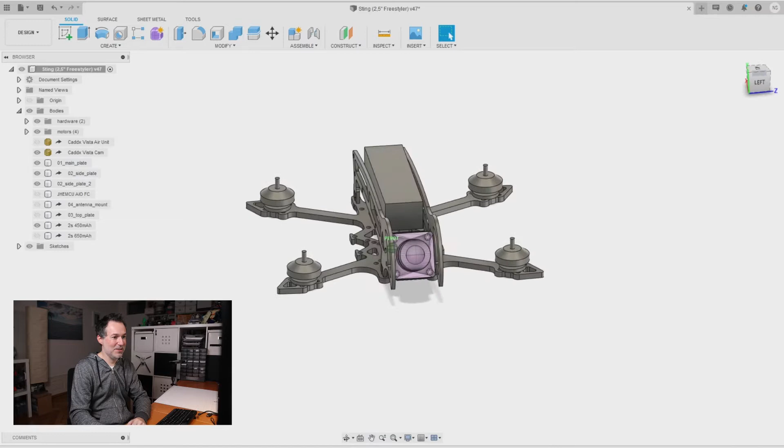As I said, it was the inspiration to have these side plates and a battery in between. In this case, this is a 2-cell 450 milliamp battery. As you can see up in front, we have the camera from the Caddx Vista, which is like the normal DJI camera. So it's not the Nebula or anything, it's the normal DJI camera.

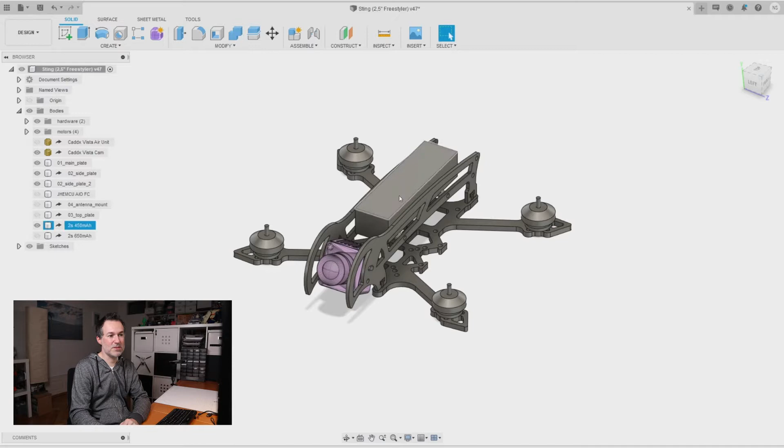I also did that because the width of the Caddx Vista camera is just perfect for putting one of these 2-cell lipos behind it. As you can see from the front, it's like a super slim setup, which is great.

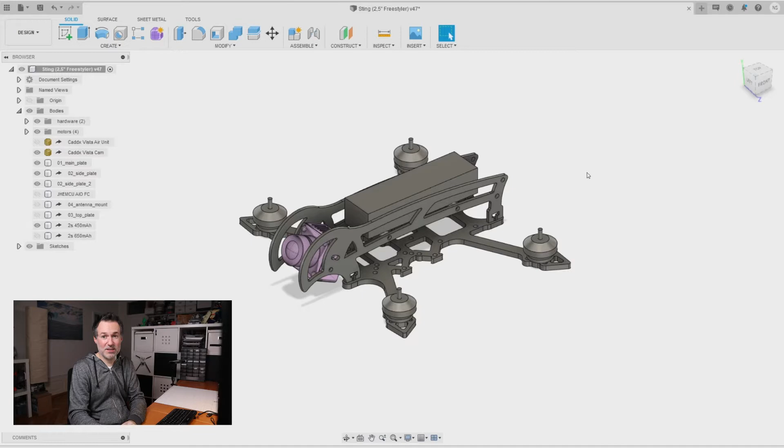All right, so where should we start? Let's maybe start with the way that the side plates are mounted with the main plate. The system that I've used here is something that I've used already, like, I don't know, 8 years ago or so, on the first frames that I did.

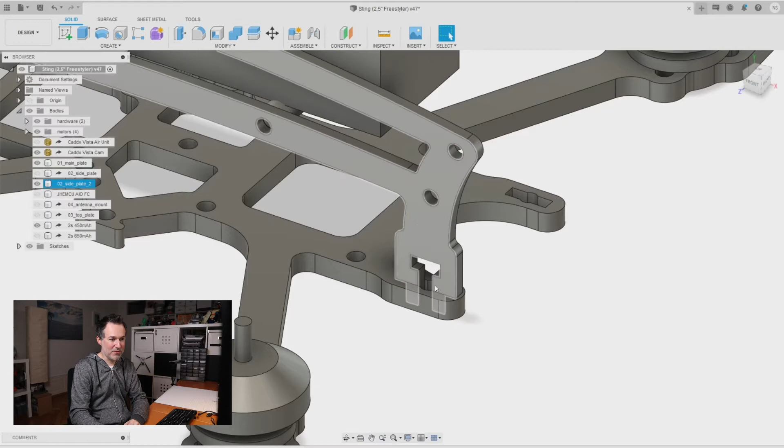Let's remove the side plates here. So basically you have these openings here, and the side plate just slides into them very snug, and they align nicely with the bottom here. What you do is you put an M2 nut right in here, you just push it in, and then you take a screw and you screw it in from below, and that creates a very tight connection.

I prefer this way if you can screw these parts down. I know there are frames out there where you just push it in and it's supposed to stick, and very often it works, but I wanted to have an extra way to screw things down. I've also seen ways where on one side you push it onto the frame and then screw it down on the other side, but I feel that causes a high risk of vibrations, which is why I wanted another way to do this, and I much prefer this nut and screw way.

If you use nylon nuts and screws, the weight is super minimal. If you want extra stability with metal nuts and screws, you can do so, although I don't really see the benefit. Also, if you use nylon screws, this is a nice way to absorb the force of an impact, because if you crash too hard, I think it's preferable that these nylon screws just snap away, and you don't damage the carbon or anything.

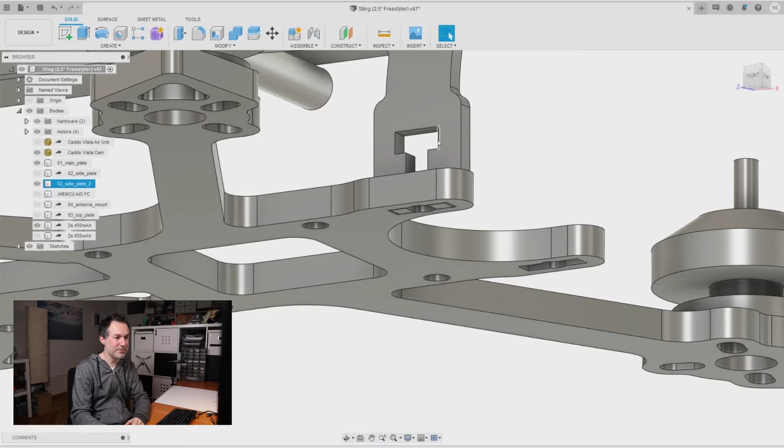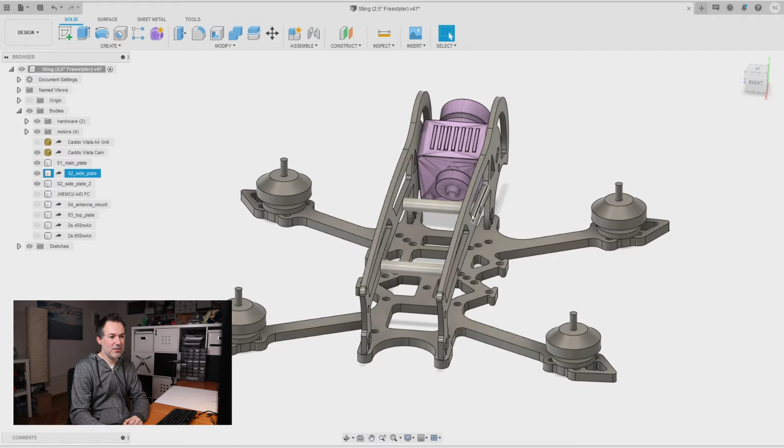All right, so this is the way the side plates are mounted to the main plate. About the side plates, if I remove the battery here, additionally to the connection with the main frame, they also use the Caddx Vista to increase stability, and you have two metal or nylon spacer bolts screwed in between. So this should really be super stable and stiff, but we'll see.

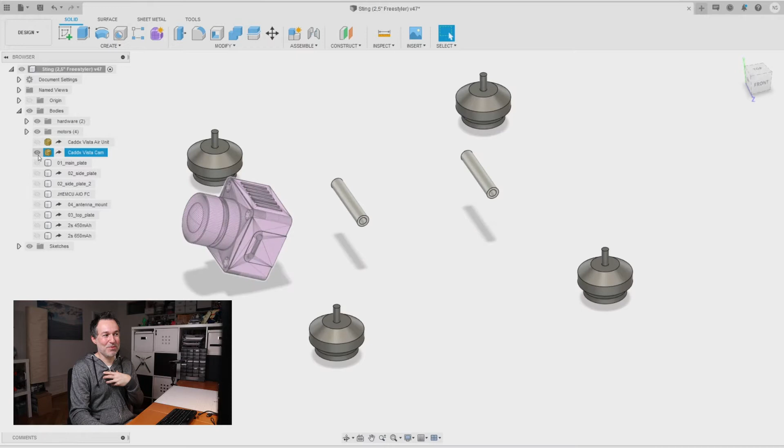Okay, then let's talk a bit about the center plate. I was around when FPV just started, so I'm calling this stuff the center plate, which of course is not really modern anymore - it's called the main plate. All right, so let's take a look at the main plate. What do we have here?

As you see, the goal was to keep everything very light, and that's why there are spaces in between, which help reduce the weight, while at the same time keeping enough elements to make sure the overall stiffness is working.

And if you look at the mounting options, you see it's a dual stack setup. You have one stack in the front with different options and one stack in the back. The stack in the back is supposed to be used with a Caddx Vista, and that's just 20 by 20, so that's fixed. At the front, you have way more options, and this is where the flight controller goes. It starts with a 16 by 16 stack setup.

Then it also has a 20 by 20 and a 25 by 25. And this 25 by 25 you can also twist at a 45 degree angle if you want to use a whoop board that would like to be mounted in this orientation. I prefer, even for whoop boards, to mount them straight and then just change the alignment in Betaflight. This works perfectly fine. But if you feel more comfortable twisting it at an angle, you're free to do so.

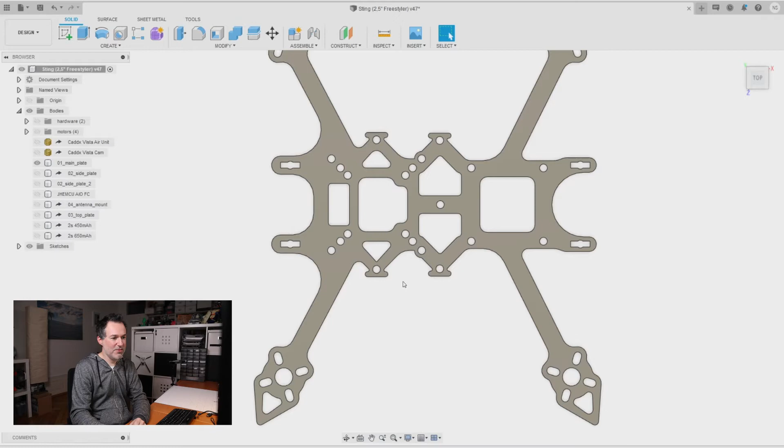All right, then what we have is - well, the battery is supposed to be mounted in between the side plates, as I said before. And if you use a little bit of foam on the left and right, this already creates a pretty snug fit. But it's not 100% secure, especially in case of a crash - the battery could easily fly off.

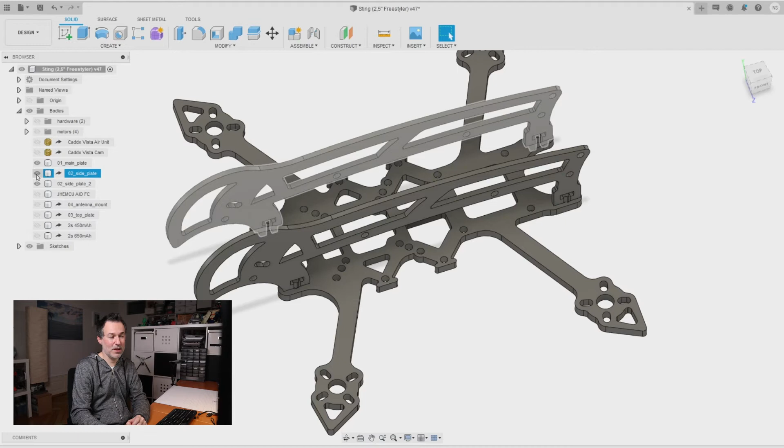So what you can do is use these little knobs here, and use a rubber band and just pull it over, and then you have a secure fit. Also, rubber bands are super cheap, everyone has some at home, and then you can just put these over these little knobs. I put 2 in, so you have 2 positions where the battery is secured. I hope that should work pretty well, but we will see in the end.

Regarding motors, I did put in support for 9mm distance of the motor mounts and 6mm, so every motor kind should be supported well.

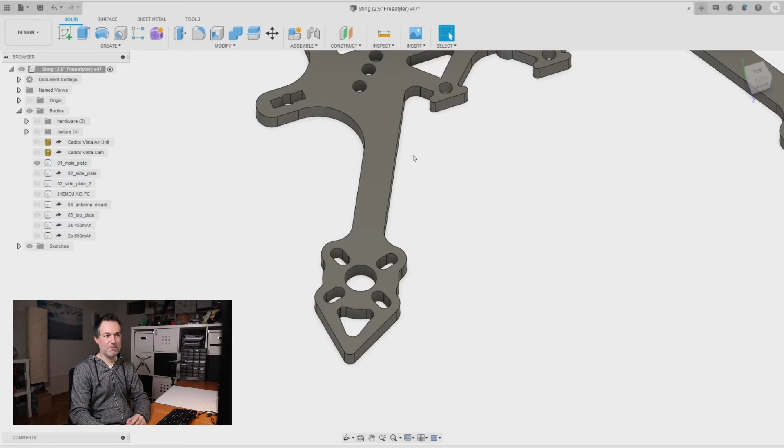In this image, the motors I've put in here are most likely the motors I'm going to use, which are the Flywoo Robo RB1205.5. I think 1205.5 is a really good motor size to use here, but more on that in the production video of this Sting frame.

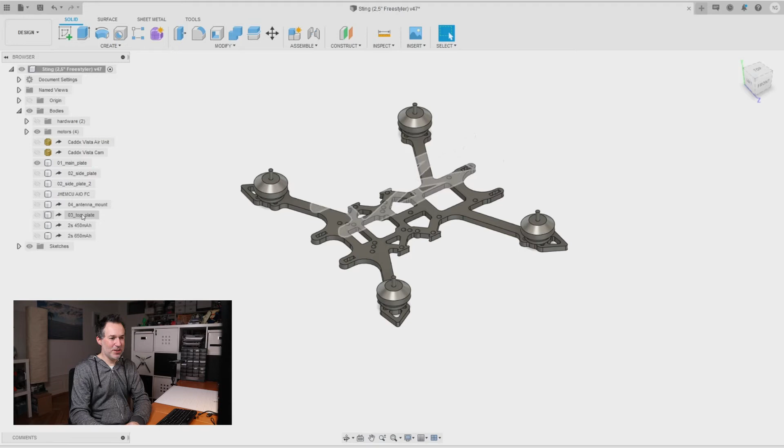All right, then one additional thing - when you look at this, let's put it together here, and regarding the Caddx Vista air unit, I do not have a model of a stripped Caddx Vista yet, but you will see that the full Caddx Vista will just not fit. It is too high, and this is just not going to work. So if you want to build this frame, you really need to strip it. That's just the way it is.

I mean, I don't want to go too much into detail about stripping the Caddx Vista, but of course the biggest concern is whether that's not going to cause any issues with heat.

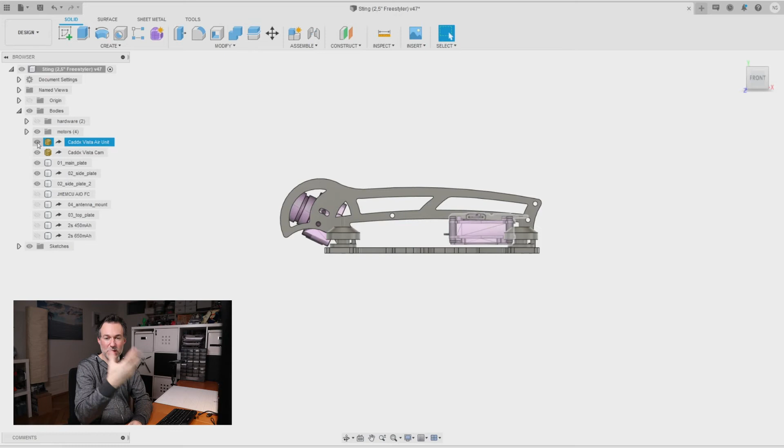I don't know of any stripped Caddx Vista that had issues due to this. The Caddx Vista does have heat protection, so it switches off when it gets too hot, but I've never had that occur on my stripped Caddx Vistas, and I've not seen anyone else have it happen. There is a certain risk if you crash into a tree and it takes a long time to bring it back down and you can't disarm and remove the battery, then maybe it could overheat, especially if you switch off the temperature control, and you might run into problems. But I will include something in my build that I'll show in the construction video that helps with that.

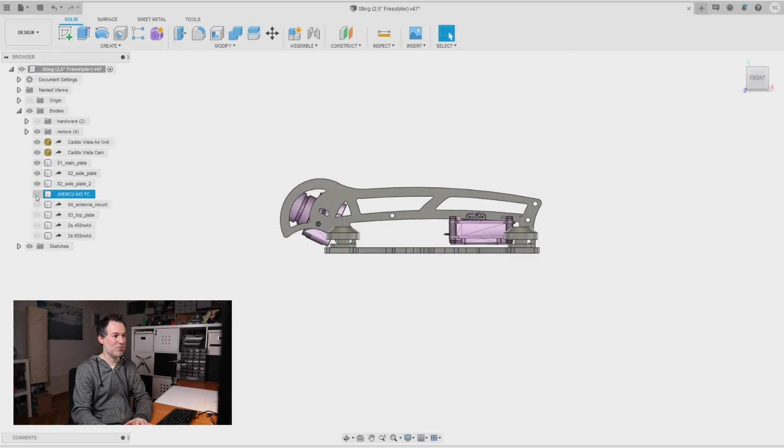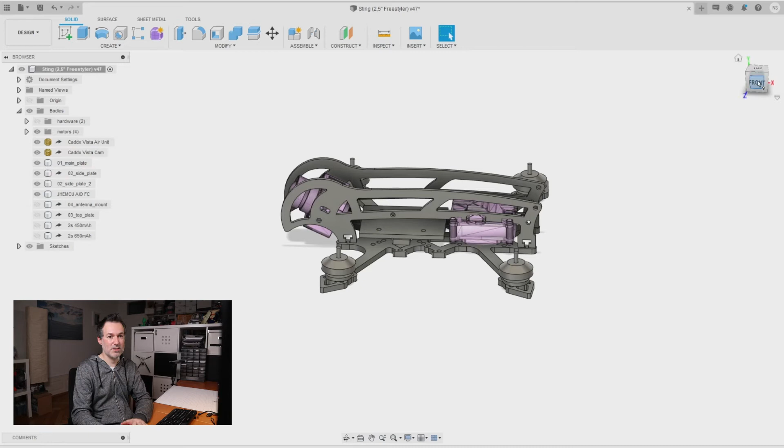One other thing noteworthy about the frame is that I plan to use one of the flight controllers I really like, the JHEMCU all-in-one board. This board is larger than usual boards, longer, and it includes the ESCs and flight controller on a 20x20 mounted stack, which is the first that does that, as far as I know. I've used this on other builds, and I really like the form factor and how easy it is to set up. So that's what I'll probably use on this setup, and the frame supports these larger boards perfectly.

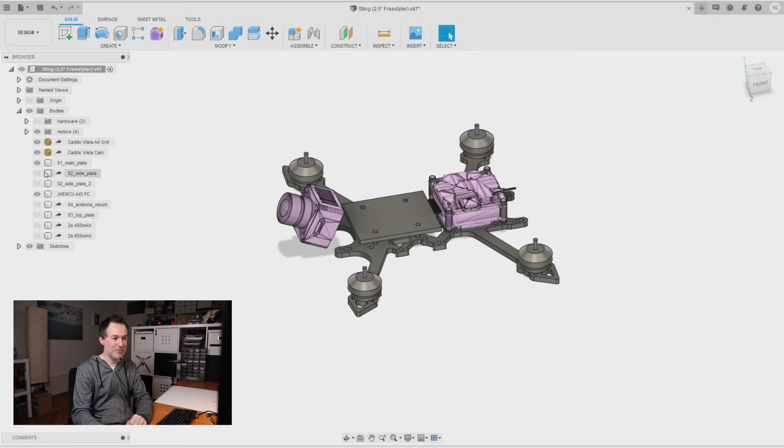So much about that. There's one additional thing I want to show you, not necessarily the main use case I plan for the frame, but I also designed an optional top plate. This top plate is a way that, if you don't feel the side plates are your thing, you can mount this top plate with normal spacer bolts, giving you a different way to build the frame.

I did this because I also want to design a 3-inch version of this frame, which I plan to use as a long range setup with two 18650 lithium ion cells. I don't know if that works or not, but I want to try it out. In order to mount them nicely, I need such a top plate. If anyone else wants to do that, or has other batteries you want to use, this top plate is something you can have CNC cut as well, and then you get the whole package.

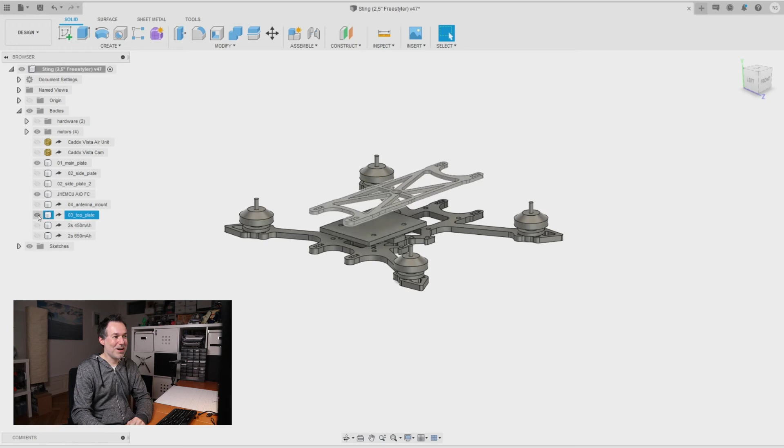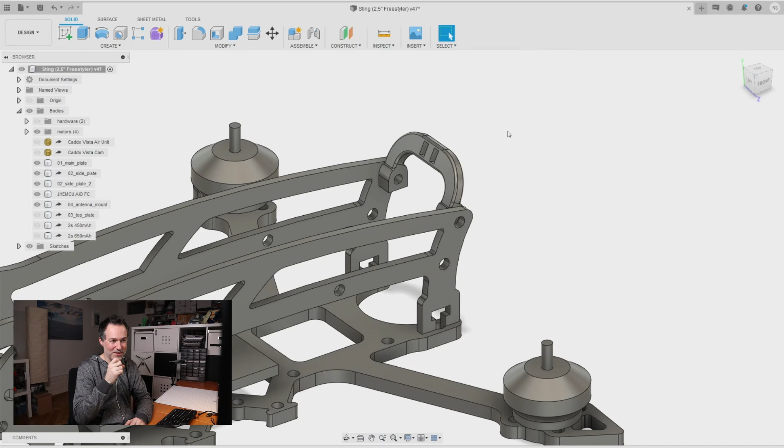One more thing I wanted to tell you about is the 3D printed parts. Actually this frame, compared to many of my other designs, does not have any 3D printed parts. Instead, there's one little helper, and that's the antenna mount. I designed it to be as small and lightweight as possible, while still providing enough security for the setup, because the issue with antennas just sticking out at the top without any way to secure them is that if you fly through a narrow passage and the antenna gets stuck at the top, this could rip off the pad of the antenna from the Caddx Vista board.

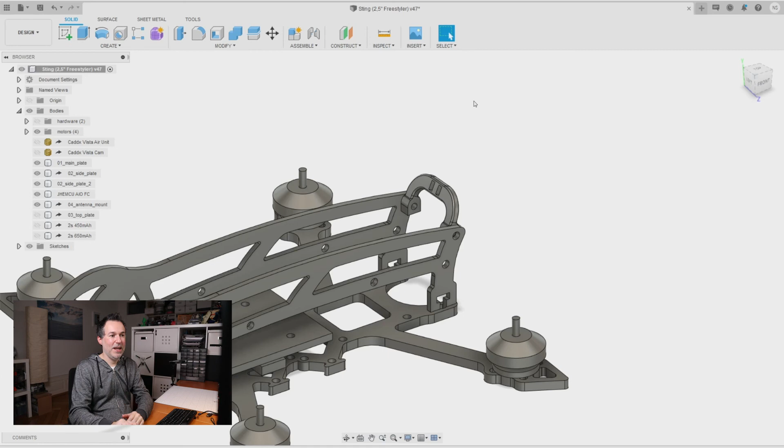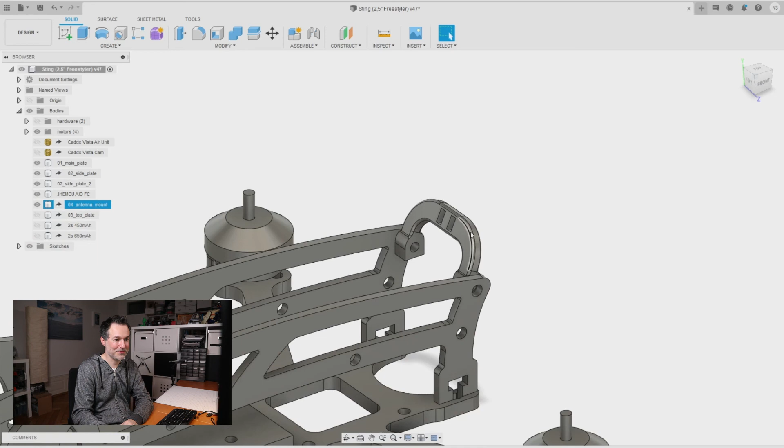In order to avoid this issue, what you do is put your antenna, align it here, and then use a zip tie to secure it nicely. This way, if you crash, the zip tie makes sure the pads don't rip off, so that's always something helpful. And it prints very nicely. I'll show you more about the 3D printed parts in the next video, which is about production.

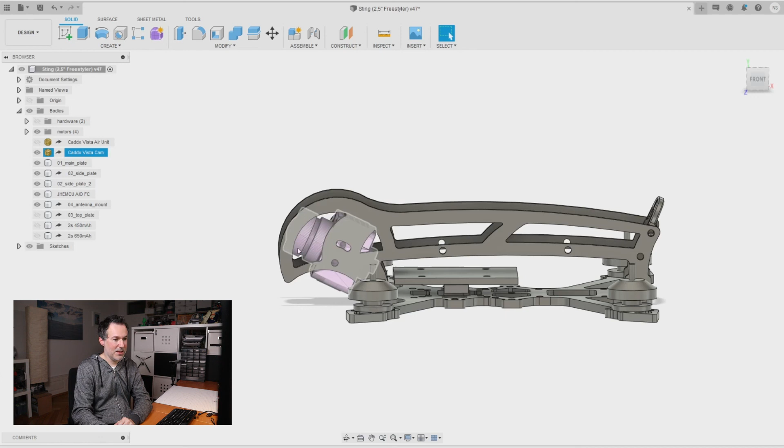This video was about the design, but I think I've said everything I wanted to mention. The Caddx Vista camera is nicely secured here on the front, between the side plates. So if there's a crash, the force goes onto here and secures the camera nicely. And as I said, if the crash is too hard and you use nylon screws here, these will just snap off and the whole thing will bend backwards. But that's, as far as I can tell, the worst that could happen in a crash for endangering the Caddx Vista camera.

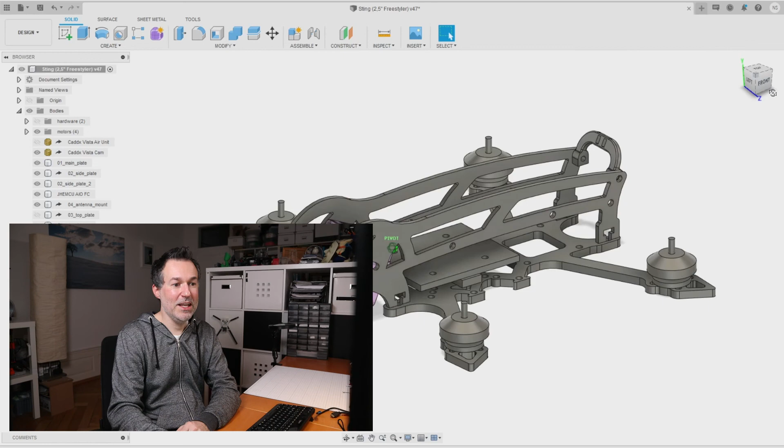All right, so that's about the design. I hope I said everything, but I think I did. If you have any questions about the design, please let me know. All the design files will be available on Thingiverse, and I'll put the link in the description down there so you can download it yourself.